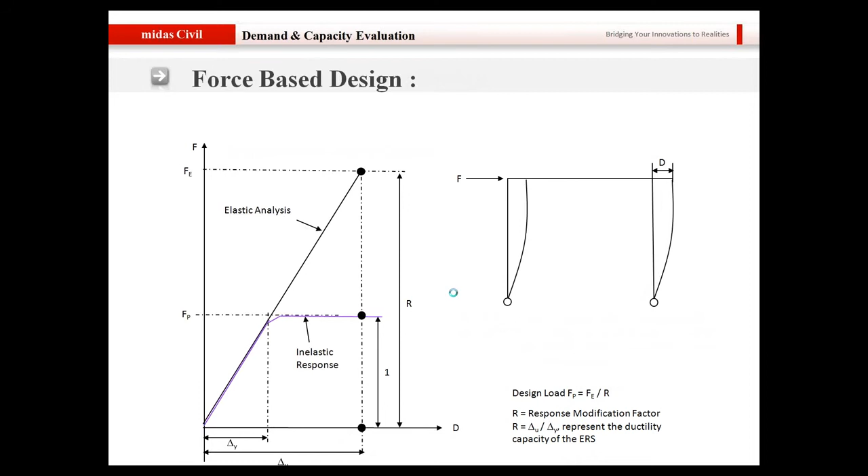What we used to do is obtain an equivalent force which is obtained by earthquake. So whenever you apply an earthquake load to the bridge, you will obtain a certain force on different elements, and basically you design the elements based on that load so that the bridge remains safe for a specific type of earthquake.

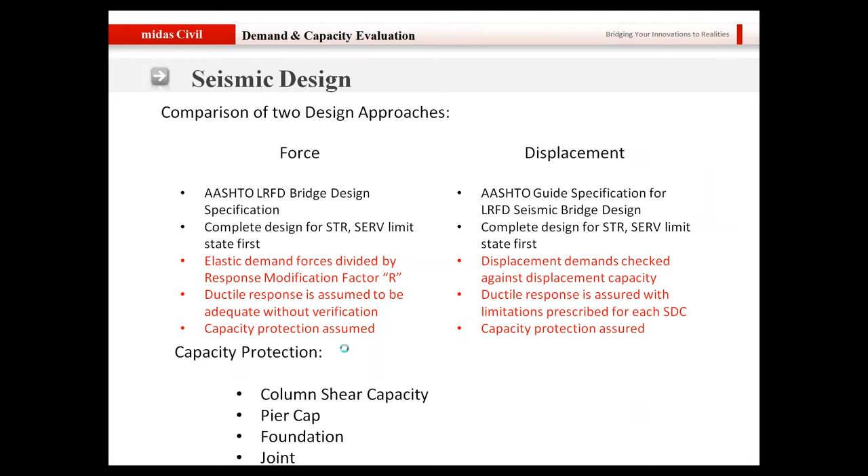And the capacity protection is done for column shear capacity, pier cap, foundation, and joint. In the second session that was done by me, I talked about the various steps which are involved in the AASHTO LRFD Seismic Design criteria to perform the displacement-based design, and I gave you the flow chart with the steps that you need to follow to perform this kind of check.

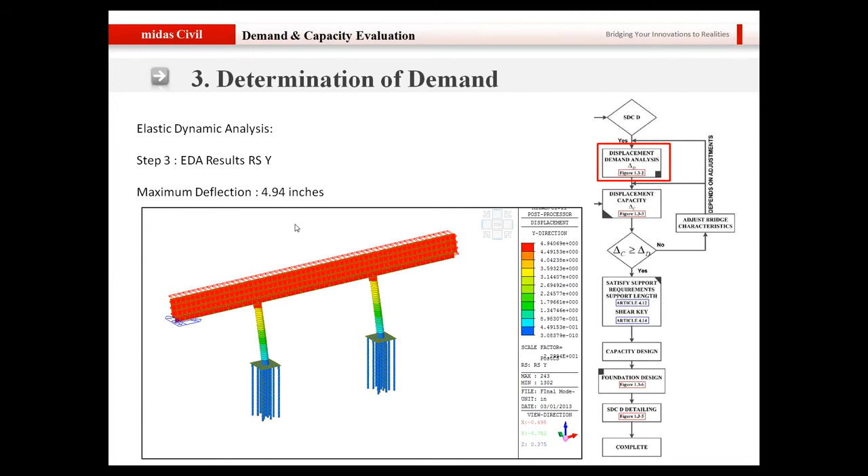And here we talked about a bridge which was a conventional bridge, and we performed elastic dynamic analysis with the provisions from AASHTO LRFD code, and we obtained the demand in the event of an earthquake. Similarly, we obtained the demand in the y direction, and then we performed the pushover analysis to obtain the capacity in the x and the y direction.

And then the capacity check was done, and this way we did the discussion on this kind of a bridge by following the procedure as given in the AASHTO LRFD Seismic Design criteria.

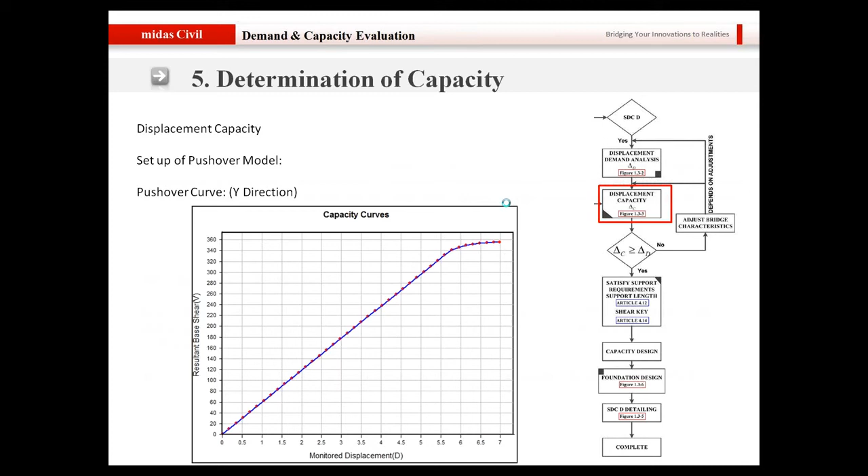Now I would like to talk more in detail about the seismic analysis, what are the different types of seismic analysis that you can perform, and what are the different advantages and disadvantages of these types of analysis. Before we actually start learning how to perform the seismic analysis in Midas Civil, I will take you through a brief introduction or theoretical background of these different types of analysis, and then we are going to simulate those types of analysis in Midas Civil.

So first of all, let me talk about what seismic analysis is. Seismic analysis is a subset of structural analysis, and it is the calculation of the response of a bridge or building structure to earthquake. So basically, in the event of an earthquake, we determine what will be the effect on the structure, and to obtain that effect, whether it is in the form of force or displacement or deformation or whatnot, it is known as seismic analysis. And why is it important?

It is important because, in the event of an earthquake, we do not want our structure to fail, or we do not want our structure to collapse, because it might lead to loss of property or loss of lives. So that's why we want our structures to be safe, and that is why the seismic analysis is becoming the need of the hour.

So let us talk about the consequences of earthquake. What actually happens when an earthquake occurs, or in the event of an earthquake, what are the different consequences that are faced by a building or a bridge.

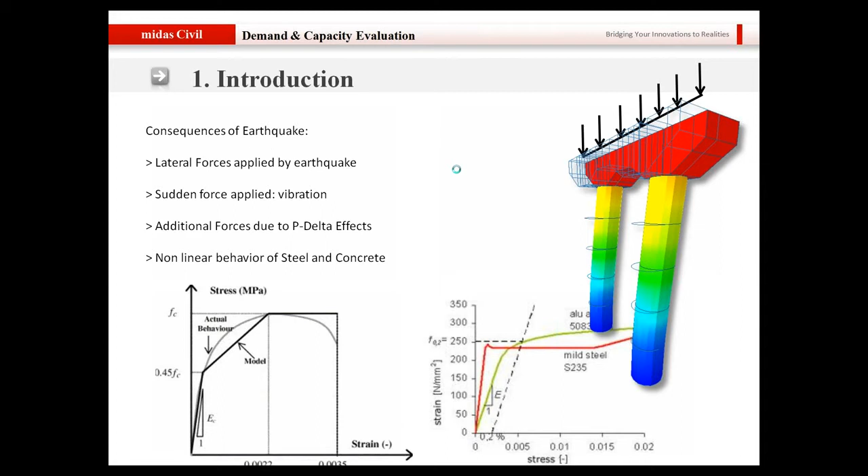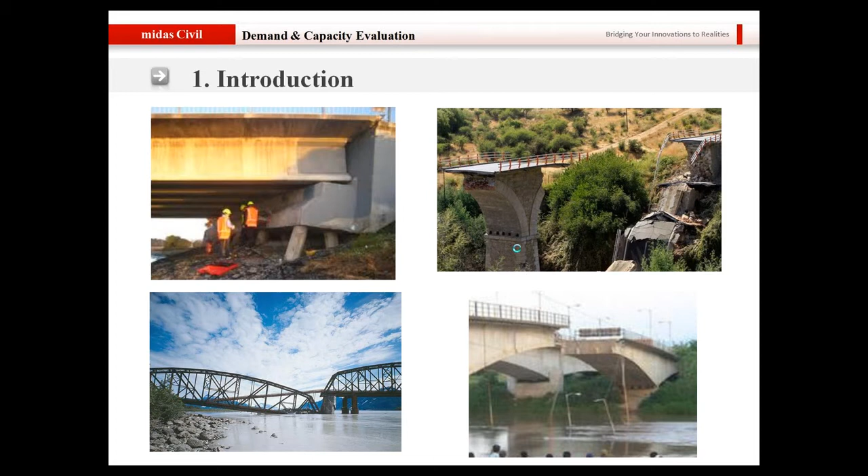So if the structure is supposed to behave elastically and we perform static analysis, we call this approach the equivalent force approach. So what we do in this method is we apply an equivalent lateral load to the structure and we obtain the force effect or the displacement in the event of an earthquake.

If we suppose the structure to be in the elastic region and we perform dynamic analysis, the type of analysis is dynamic, in which the equation of motion is used. We call it the response spectrum analysis, or if you talk about the AASHTO LRFD Seismic Design criteria code, they call it elastic dynamic analysis. So when you say elastic, it is the structure action, and when you say dynamic, it is the type of analysis.

If you consider the structure to be of nonlinear behavior, you take into account the nonlinearity of steel and concrete, and if you perform a static analysis, it becomes a nonlinear static analysis, also known as pushover analysis. And if you take into account the nonlinear behavior or characteristic of steel and concrete and you perform a dynamic analysis, we call it a nonlinear time history analysis.

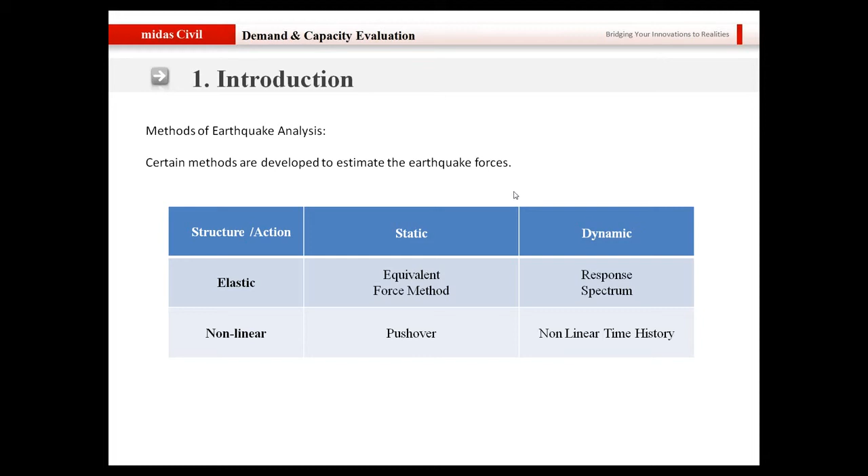The disadvantages are it doesn't take into account the dynamic response of the structure. As I said, in the event of an earthquake, the structure vibrates. There is an acceleration, or you can say force applied to the structure, and it must have some dynamic response to it, and this method fails to capture that.

The non-linearity of the material is ignored because it's a static seismic analysis. We consider the structure to be in the elastic region. We ignore the non-linearity, and it does not lead to detailed response in earthquake.

In the event of an earthquake, there would be vibration. The structure might respond differently with time. The deformations may increase or decrease with time, and since it's a static seismic analysis method, it doesn't give us the detailed response in the event of an earthquake. It might give us the maximum deformation and stuff like that, but it doesn't give us what the response will be with respect to time.

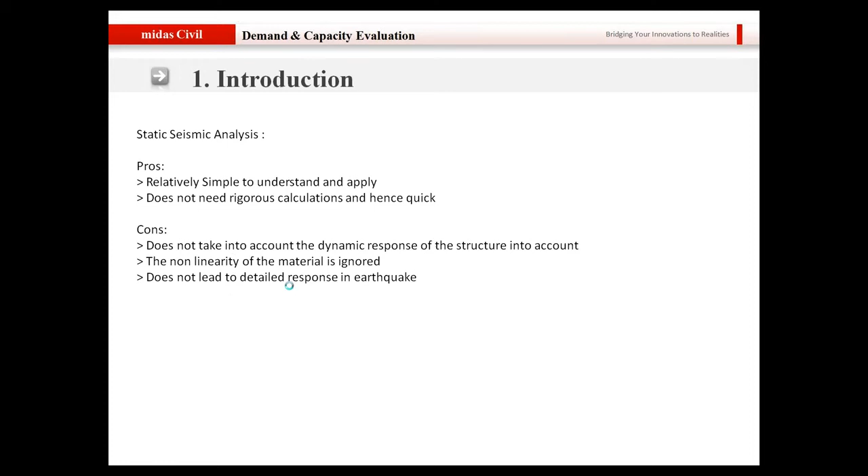There are certain disadvantages with this method: you cannot consider the non-linearity of the material. It is ignored, and it does not lead to a detailed response again. Basically, you do not apply a timed force to the structure, and it does not lead to detailed response in terms of the event of an earthquake.

Now, talking about the nonlinear static analysis or pushover analysis, there are certain advantages. It is simple to understand and apply. If you see the theory behind the pushover analysis, which I'm going to talk about later during the session, you will see that it's relatively very simple to apply, and we take into account the nonlinear behavior of concrete and steel.

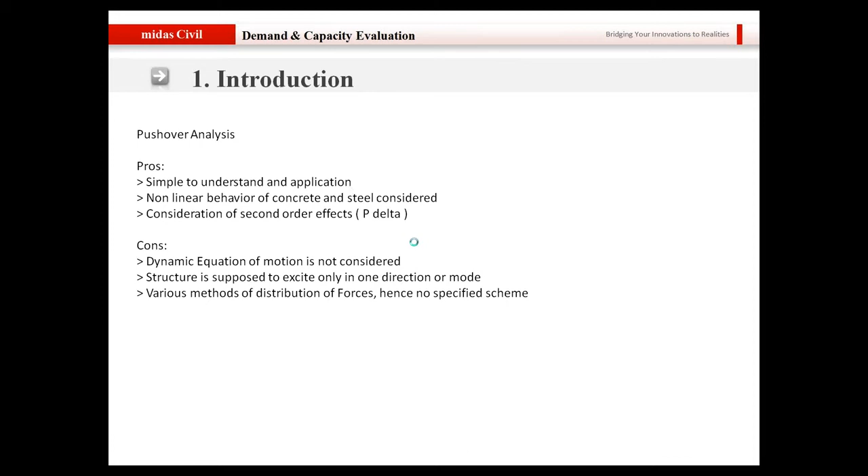Now let us talk about the fourth category of seismic analysis, which is time history analysis. It is the best among the different types of analysis we talked about, and it has certain advantages. It considers the dynamic equation of motion, so it is realistic. It takes into account the nonlinear behavior of concrete and steel, so it's more practical. It gives the displacement, velocity, or acceleration of the structure with time, basically the response of the structure with respect to time. It is better, and it considers damping, so it's more realistic.

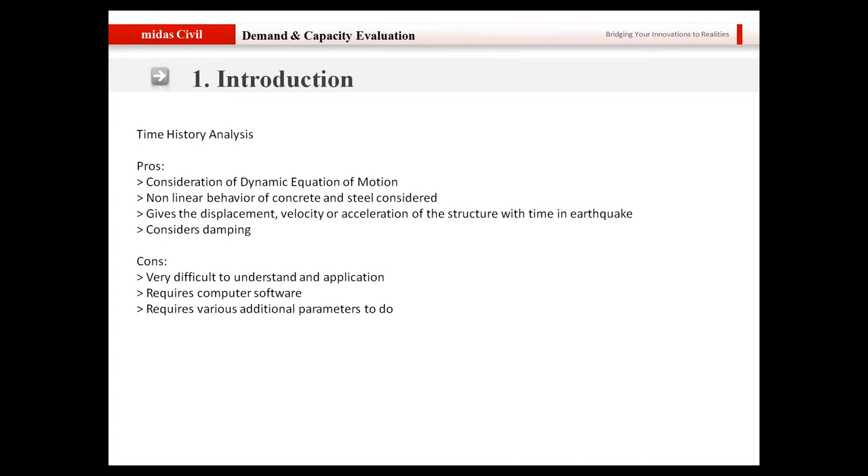But there are certain disadvantages with this method. It is very difficult to understand and apply. You have to apply the equation of motion and consider the nonlinear behavior of concrete and steel, so it is complicated to understand and apply, and it generally requires computer software. If you want to perform this type of analysis with hand calculations, it might take months even for a simple structure, and it requires additional parameters to perform this type of analysis. So when performing time history analysis, you have to take into account so many parameters of the bridge that sometimes it becomes disadvantageous.

Now let us talk about what the AASHTO LRFD code says about seismic analysis. I have listed down several specific features of our code, and first I'll be talking about the different highlights. The code adopts a 7% in 75-year design event for the development of a design spectrum, and we should ensure sufficient conservatism.

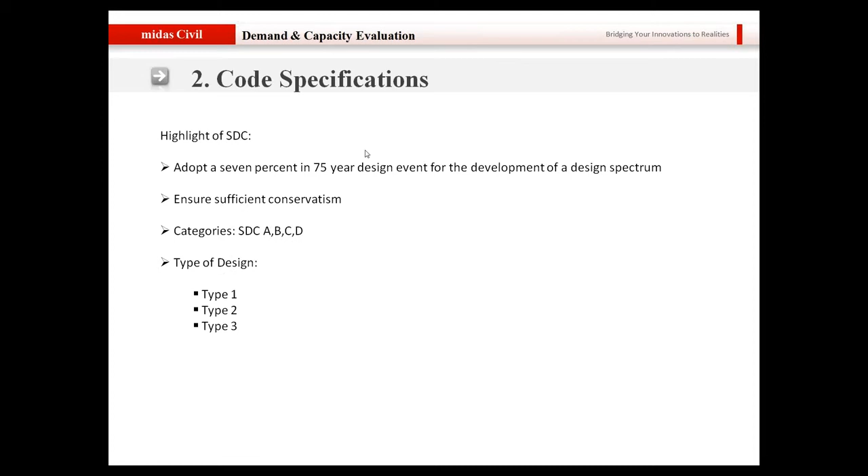There are several categories: A, B, C, and D, with different types of design. I discussed the details about these categories and design in the previous session, but just to recapitulate, I'm going to talk about the different categories of SDC here. In SDC-A, no displacement capacity check is needed as per the code. No capacity design is needed. SDC-A minimum requirements are to be there, and you don't have to perform liquefaction analysis.

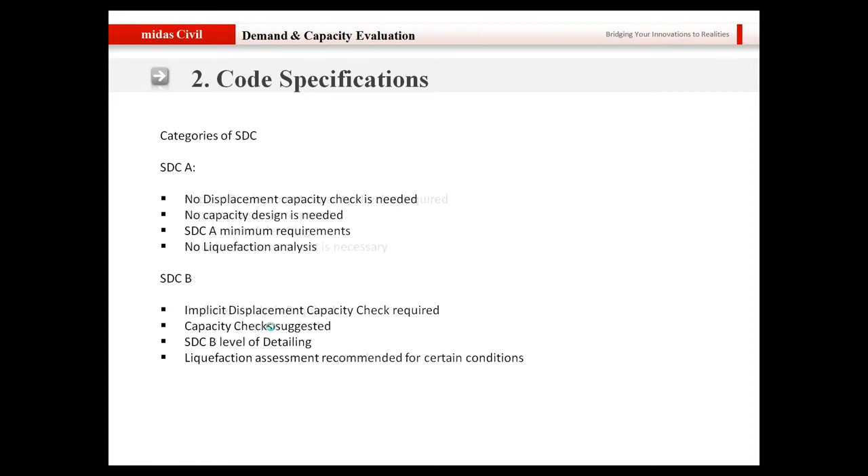So basically, when you are moving from A to D, the code becomes more and more stringent. For A, you do not need to perform any displacement capacity check, but for B, you need to perform an implicit displacement capacity check. When you talk about SDC-C, it is again more stringent compared to SDC-B, and SDC-D is the most stringent amongst all. For SDC-D, you need to perform pushover analysis and capacity design. The SDC-D level of detailing is required, and the liquefaction assessment is a must for this category.

Talking about the type of design: type 1 would be a ductile substructure with an essentially elastic superstructure. Type 2 design would be an elastic substructure with a ductile superstructure, and type 3 would be elastic superstructure and substructure with a fusing mechanism at the interface between the superstructure and the substructure. So when talking about type 3 design, you have to have certain types of bearings which control the flow of forces from the superstructure to the substructure.

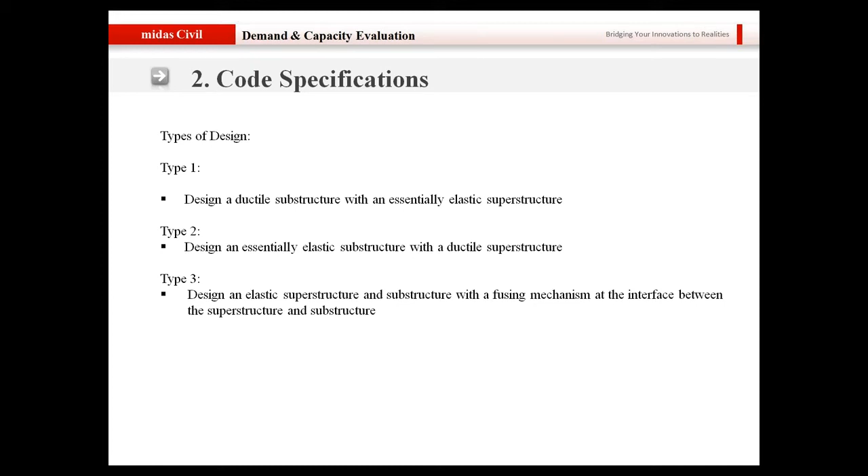Talking about the flow charts given in the code for performing the check for these categories, here you can see the check for SDC A, B, C, and D. SDC A doesn't require the demand analysis, but SDC B, C, and D require the demand analysis. So for obtaining the demand, we are trying to simulate SDC D here.

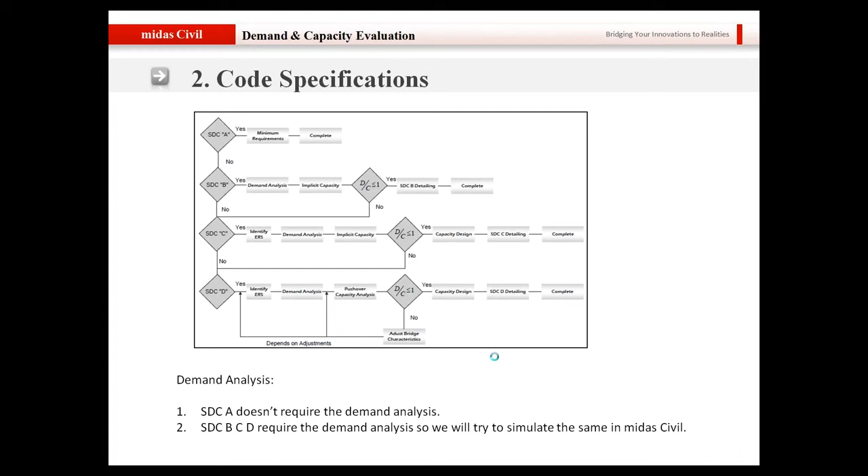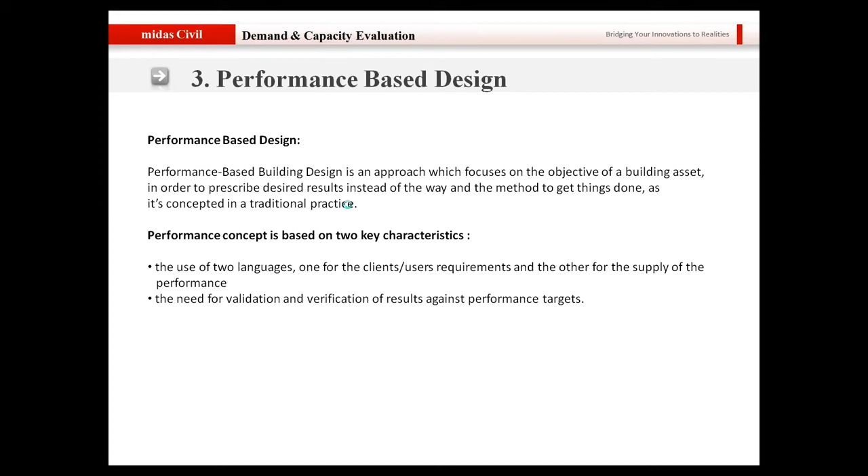Before I start talking about the elastic dynamic analysis for an SDC D structure, I'm going to talk about performance-based design. Performance-based design is an approach which focuses on the objective of a building asset in order to prescribe desired results instead of the way and method to get the things done. So when you talk about performance-based design, first you set up what is the performance criteria for a structure, what is the demand, and based on the demand, what is the capacity of the structure. The assessment would be okay as per performance-based design when the capacity is greater than the demand.

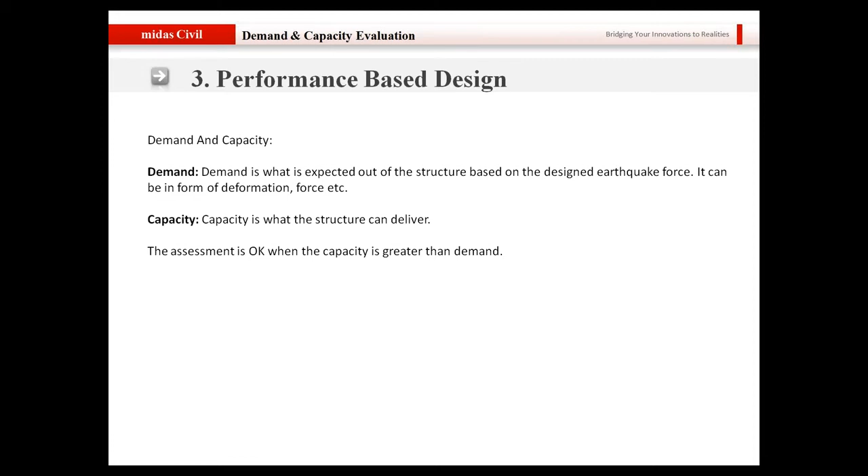If you talk about the demand analysis, for seismic design category A you do not need to perform this kind of analysis, as I said earlier. But for B, C, or D, you use procedure 1 or 2.

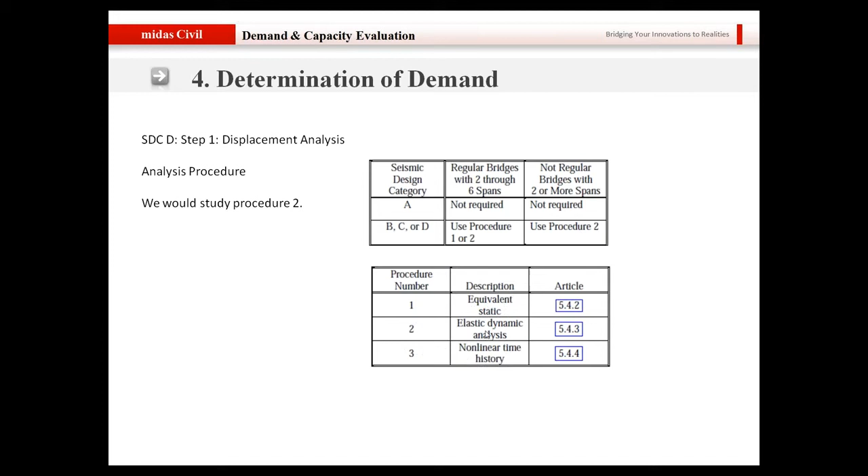Procedure 2 is elastic dynamic analysis, procedure 1 is equivalent static analysis, and procedure 3 is nonlinear time history analysis. Today we are going to talk about the elastic dynamic analysis.

There are certain considerations or guidelines which the code specifies for performing this type of analysis. First, we need to take into account different modes for performing this type of analysis. The damping must be selected as 5%, and the results in different modes should be combined as a complete quadratic combination. As I said earlier, there are different methods of combination of results for elastic dynamic analysis, and the complete quadratic combination is one of them.

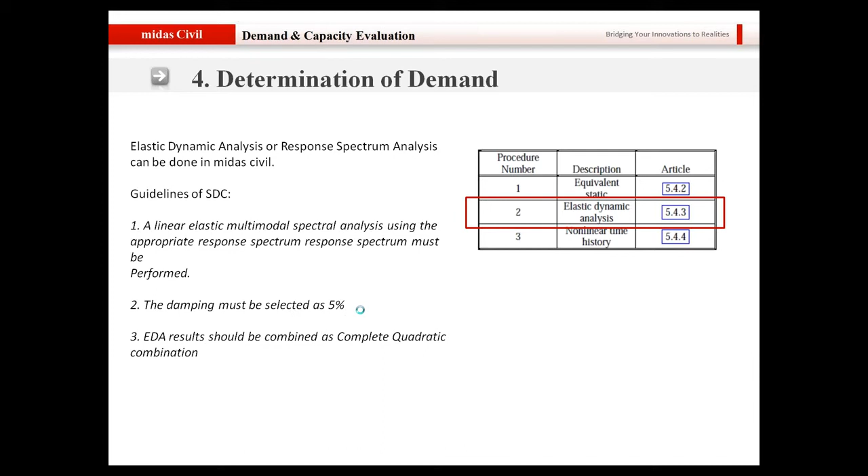The code specifies that we have to combine the results as per the complete quadratic combination. I'm going to talk about what this combination is, but before we do that, let us talk about the theory of response spectrum analysis.

As I said earlier, response spectrum analysis is a dynamic analysis which combines the response spectrum with the time period of the structure. Basically this kind of analysis utilizes an equation of motion to obtain the effect of the structure in the event of an earthquake.

The mass matrix multiplied by the acceleration, the damping multiplied by the velocity, and the stiffness multiplied by the deformation will be equal to the mass of the structure multiplied by the ground acceleration. But the question is how to obtain the ground acceleration.

The ground acceleration would be obtained as a combination of response spectrum and the eigenvalue period. So when performing response spectrum analysis, step one is to obtain the period of vibration in different modes for the structure, and on the basis of that period you will obtain the ground acceleration to be used in this equation.

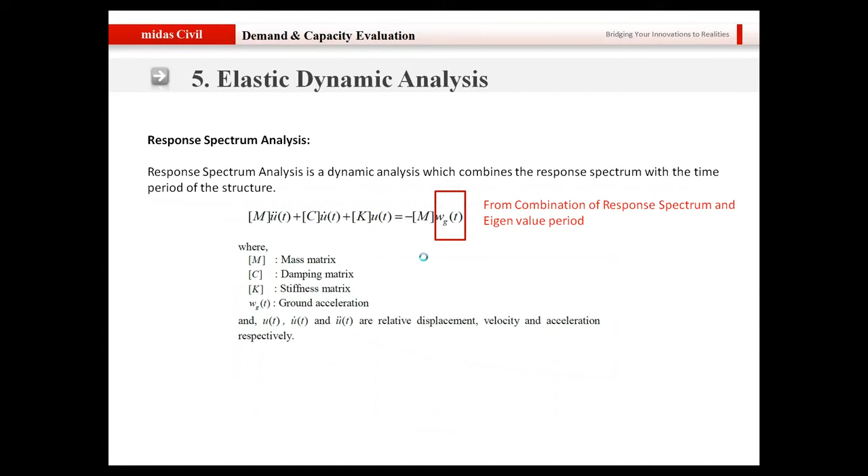Let me talk about the two requirements to obtain the acceleration. I said you need to have a response spectra. What is this response spectra? The response spectra is a function of period.

It's a function of period with the spectral acceleration, and in the last session I talked about how you can obtain this kind of response spectra as per the code. The code has different charts where you can obtain the different values that you need to obtain this kind of response spectra.

After you obtain the response spectra, you will obtain the period of vibration of the structure in different modes. Here I have shown the example of two modes of vibration for this structure, a pedestrian bridge - mode 1 of vibration and mode 2 of vibration. The time period of that vibration will be combined with the response spectra to obtain the acceleration.

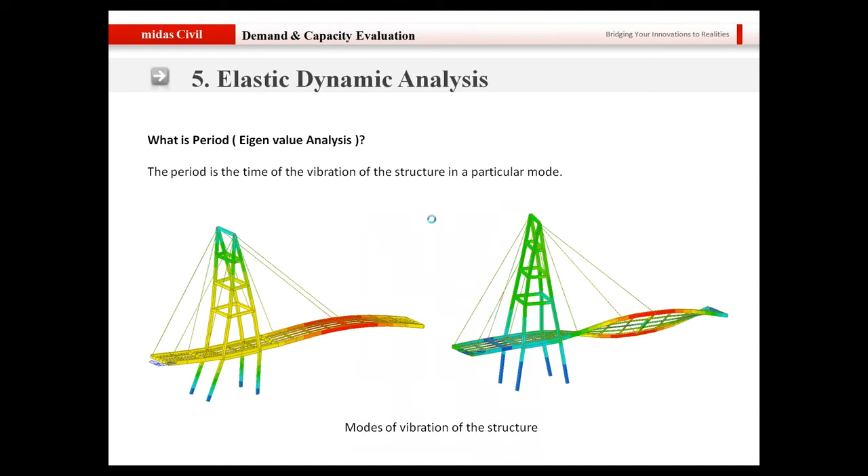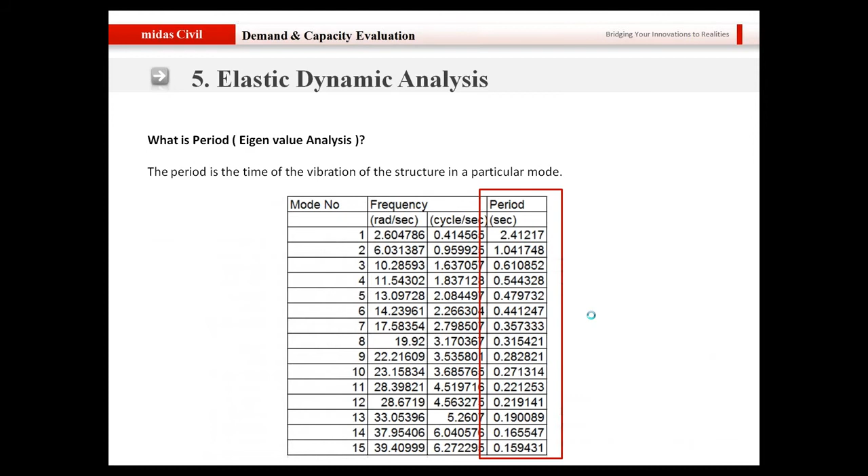I performed eigenvalue analysis and obtained the different modes of vibration and the period. Once I obtain the period, I will plot it with the response spectra and obtain the acceleration for different modes. For mode 1, the period is 2.41 seconds.

We will obtain the acceleration as 0.75 times the acceleration due to gravity. The 2.41 period will be somewhere here, and when you draw a straight line and extend it towards the spectral acceleration, you will obtain an acceleration of 0.7 times g. For mode 2, the period would be 1.04 seconds, so the acceleration would be approximately 1.25 times the acceleration due to gravity.

This is how the response spectrum analysis, or the elastic dynamic analysis, works. You will obtain the acceleration that you multiply with the mass matrix to be used in the equation of motion to obtain the effect on the structure.

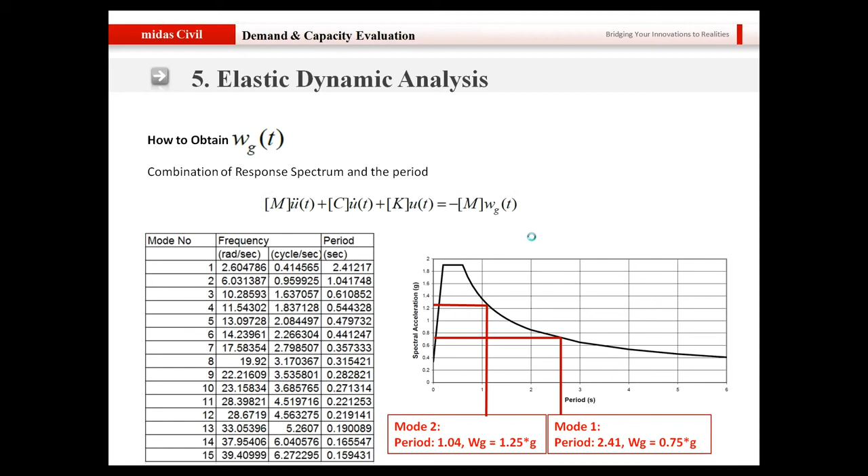As I said earlier, you need to combine the results from different modes while performing response spectrum analysis, and there are several approaches to do that. The first and easiest approach is the absolute sum, where you just keep adding the effects obtained from individual modes. The second is SRSS, the square root of sum of squares.

So basically you take a square root of the sum of squares of different effects. If you talk about the reaction at a particular bearing, you will obtain the reaction due to different modes, and then combine them using the square root function.

But the complete quadratic combination is a little bit complicated, and this is what AASHTO LRFD specifies. It takes into account the damping ratio as well as the response and the peak response, and this is how it's combined. So it's a bit complicated, but this is what AASHTO specifies for obtaining the results of elastic dynamic analysis.

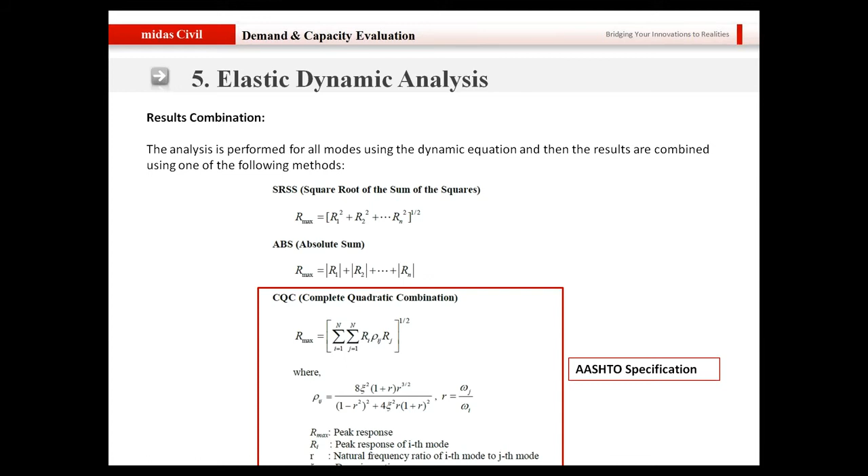So now we'll talk about how you can perform elastic dynamic analysis in Midas Civil.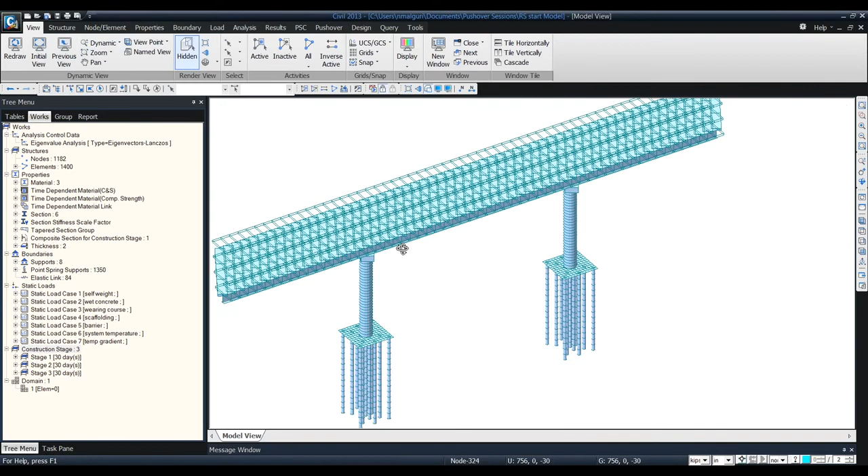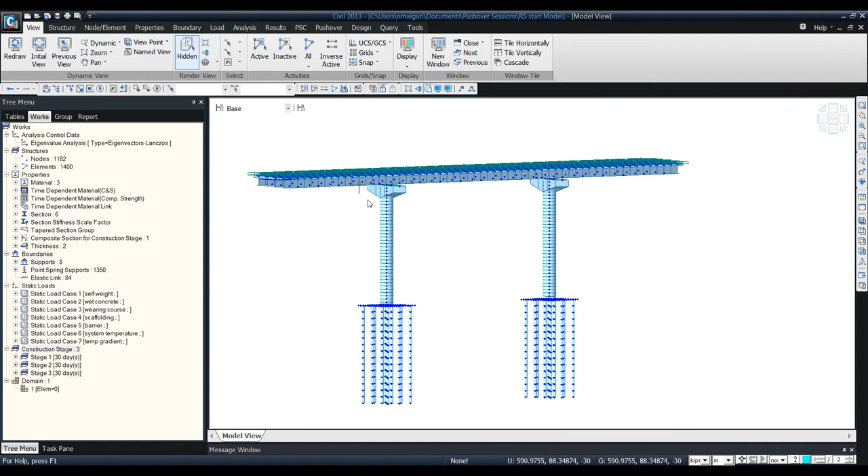Let me first talk about the specifications of this particular bridge. It's a skewed bridge and it's a steel composite bridge. For performing different types of analysis, I have considered the different elements of the bridge. You can see the substructure is modeled, the piers and pier cap are modeled. I have modeled the bearing connecting the pier cap and the girder, and I have also modeled the foundation so that I can perform the soil structure interaction.

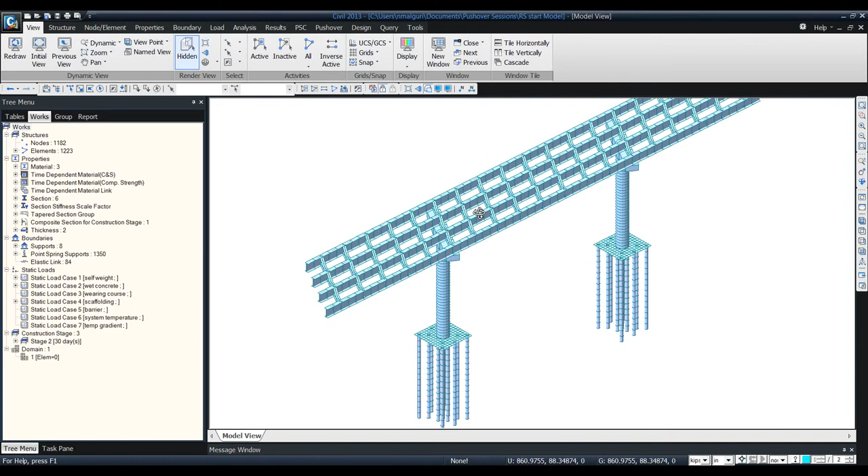Basically for this particular bridge, I modeled 3 different stages. Stage 1 is where the substructure has been erected, then stage 2 is when the steel girders have been erected. At this stage the steel girders are not composite with the concrete deck on top, and in the 3rd stage the concrete becomes composite with the steel girder, making it a composite bridge. So these are the 3 different stages modeled in this bridge.

So for performing the elastic dynamic analysis, first we need to define the mass of the structure. For defining the mass, we have 2 options in Midas Civil. The first option is to define the mass manually, by going to Load and defining it there. Under Load and Static Loads, you can define the nodal masses, select the nodes, and define different types of nodal masses.

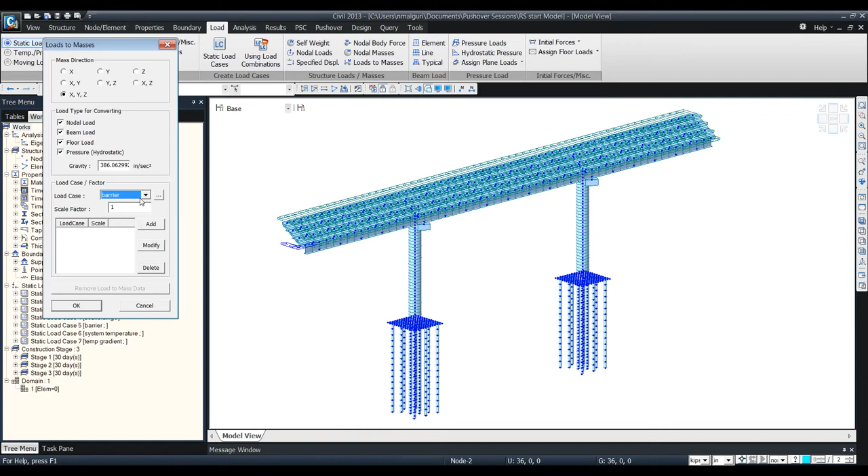If you have defined certain static loads on the bridge which you want converted to masses for seismic analysis, you can use the Load to Masses function. Let's say you have barrier loads. The barriers aren't modeled in this bridge; I just applied the barrier load as a uniform load. So I'll convert the barrier load into mass using the Load to Mass function, and once I do that, the barrier load is applied as mass onto the edges of the bridge. Similarly, if you want to convert the wearing course load into mass, you can also do that.

So I selected the load case as wearing course, and once I click on OK, you will see that the wearing course has been converted into the mass.

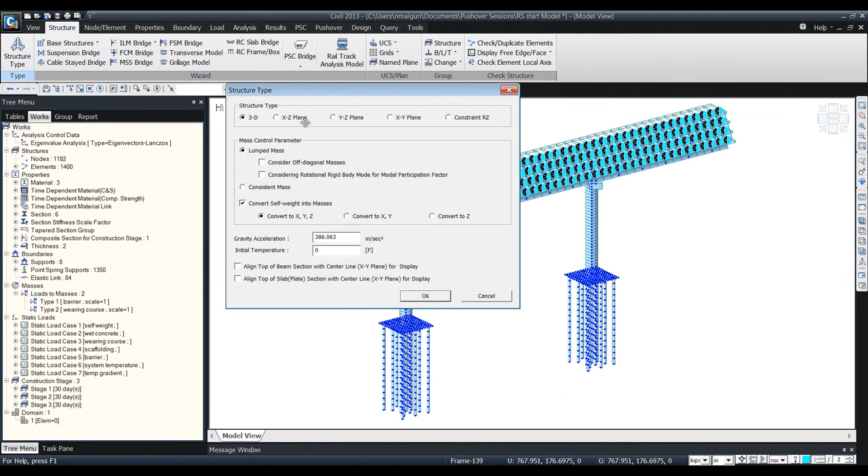The second method of defining the mass to the structure is converting the self-weight into the mass. For that, you will go to the structure option and click on structure type, and here you can see an option called convert self-weight into masses, wherein you can convert the self-weight into mass in the X, Y, and Z direction. Once you do this, the self-weight will automatically get converted into mass in those directions.

Now, as I said before, for performing the elastic dynamic analysis, you need to obtain the period of different modes of vibration. So for obtaining the period, we will perform an eigenvalue analysis. I'll go to analysis, then eigenvalue analysis, and here I'll define the number of modes that I want for this particular bridge. I've defined the number of modes to be 50, and once I do this, the eigenvalue analysis is defined for this particular bridge.

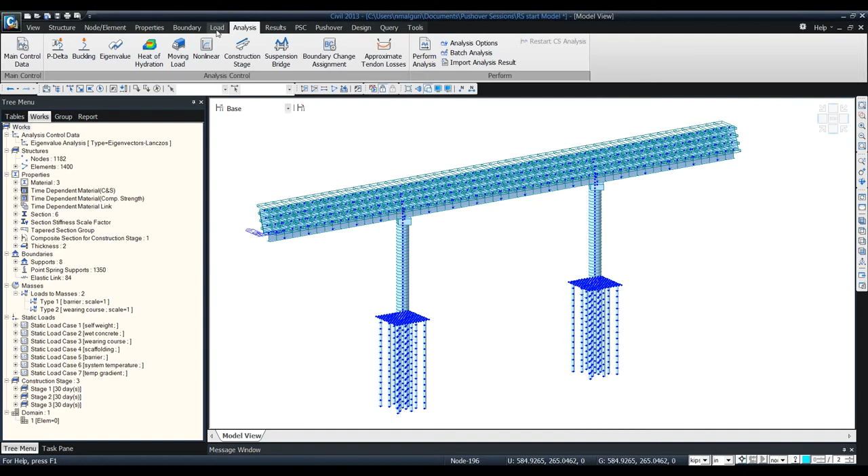After we do this, we can define the specifications for response spectrum analysis. For that, I'm going to go to load, then the seismic section, where you can define the response spectrum function. First I'll click on Add, and here you can see that you can specify the period and the spectral data.

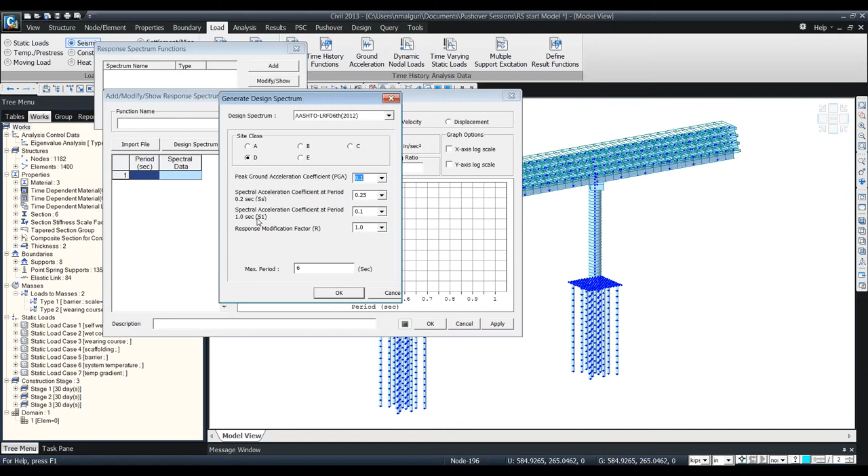In Midas Civil, we have a built-in function for the definition of response spectra as per AASHTO LRFD 6th edition, and you can select the site class. You can define the peak ground acceleration, the spectral acceleration coefficient at short period and long period, and specify the response modification factor. Once you click on OK, the response spectrum will be automatically defined by the program. So basically all you gotta do is specify the features, and the response spectrum will be automatically defined.

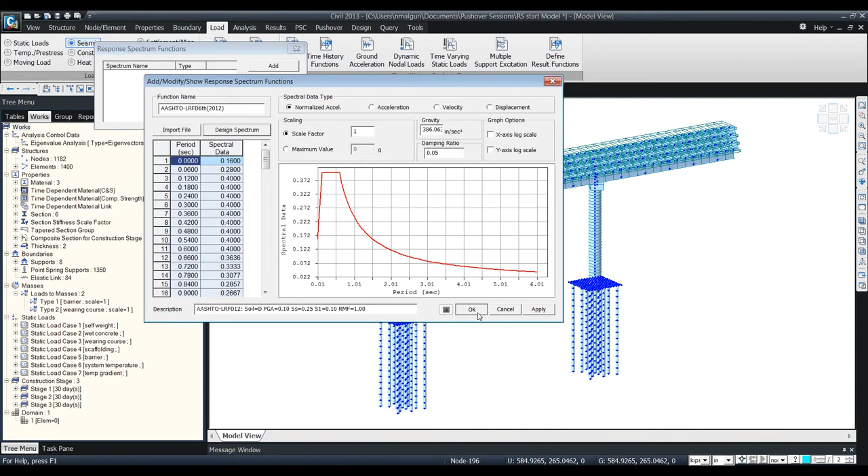Now once I click on OK, you will see that the response spectrum function has been defined. So this is step one. Right now you have defined the response spectrum function, but now you will tell the program that you will use the response spectrum function to perform the response spectrum analysis in the X and the Y direction.

So for that, I'm going to go to the response spectrum load cases, and I'm going to create a response spectrum in X direction. I'll name it RSX, and click on the response spectrum function that I'm going to use, then click on apply damping method. I will apply the damping ratio for all modes to be 0.05, and once I click on OK and then Add, the response spectrum load has been applied. So basically I have specified the response spectrum load in the global X direction.

For applying the response spectrum load in the global Y direction, I can put the excitation angle to be 90 here, and again I click on Add to obtain the load case RSY in the Y direction.

In Midas Civil, you can click on the modal combination control here, and select what type of modal combination you want. As I said before, AASHTO LRFD specifies that we use the complete quadratic combination, so we will select CQC here. If you want to specify a factor to any specific mode shape, you can specify the factor here, and once you click on OK, you are using the CQC method for performing the response spectrum analysis.

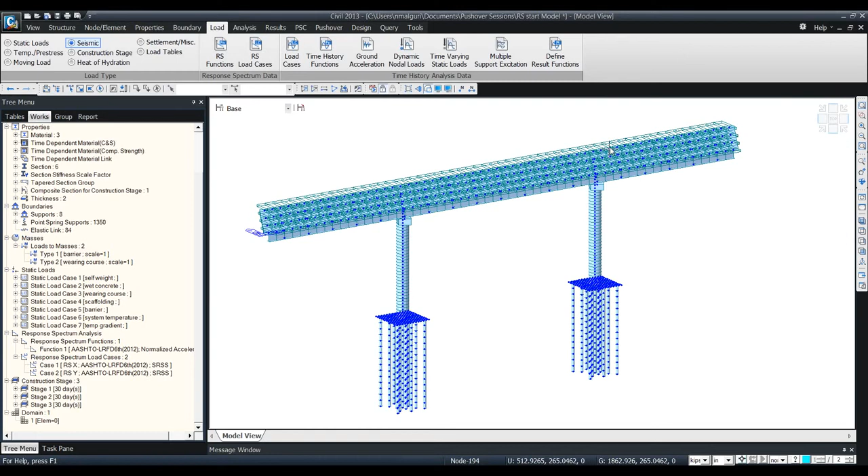So as of now, the definition for response spectrum analysis is complete, and now we are going to perform analysis to obtain the results for response spectrum analysis. I'm not going to perform the analysis in front of you because it might take about 30 seconds. So I'm going to open a model in which I have performed response spectrum analysis, and I will use that model to show you the results.

After I perform the analysis, I can go to the results tab, and if I want to obtain the deformation due to response spectrum analysis, I can go to deformation, then displacement contour, and I will obtain the deformation for the response spectrum in the X direction. So I will select the load case as response spectrum in the X direction.

I will select the component as DX, and I will click on legend, and this is how the deformation in the X direction looks like.

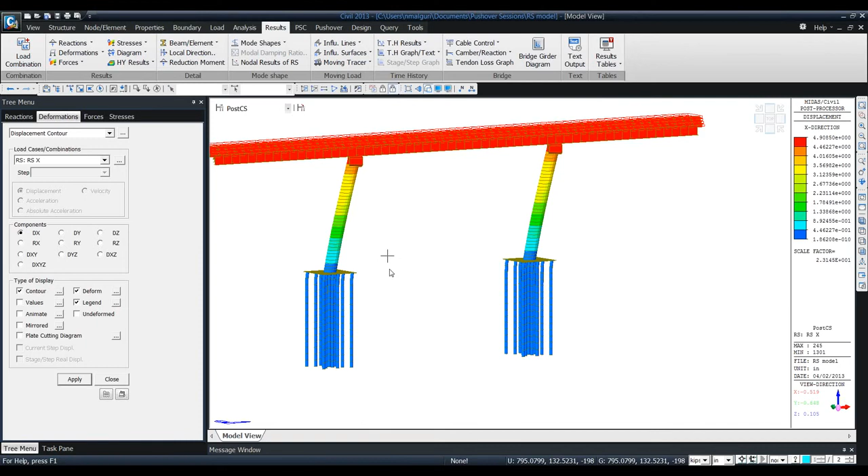If you remember in the last session, I told you that AASHTO LRFD specifies that the foundation must be taken into account to perform the demand analysis. So in this particular model, we do have the foundation with us. Basically, you are performing the response spectrum analysis and soil structure interaction in the same model file.

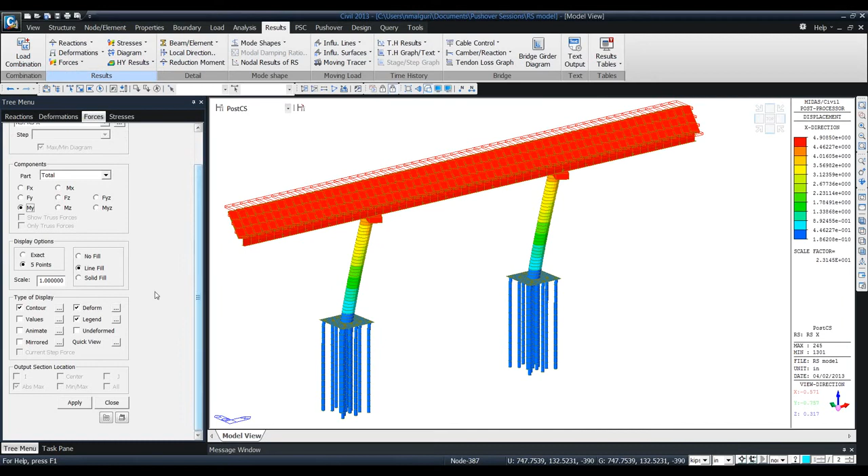You can obtain the demand from this function. If you want to obtain the forces, you can go to Result, Forces, Beam Diagrams, and let us see what is the bending moment generated in this particular bridge for the pier section after we perform the response spectrum analysis. So this is how the bending moment is generated. You can see the highest bending moment is being generated in the pier section here.

So basically you can obtain the force results. If you want to obtain the stresses, you can go to the stresses section and you can obtain the stresses due to the response spectrum loads. So this is how you perform response spectrum analysis in Midas Civil, and you obtain the results for the same, and basically the demand analysis section is completed.

Now I'm going to go back to the presentation again, and we are going to talk about how to obtain the capacity from Midas Civil.

So step 2 would be capacity determination, and here we are going to use the pushover analysis as specified in the code for SDC-D.

For SDC-B, C, and D, the bridge design shall specify the following specification: the demand must be less than the capacity. For the calculation of the capacity for SDC-D, we can perform nonlinear static analysis, that is pushover analysis. But for SDC-B and C, you can use the equations which are provided in the code, and you can obtain the capacity.

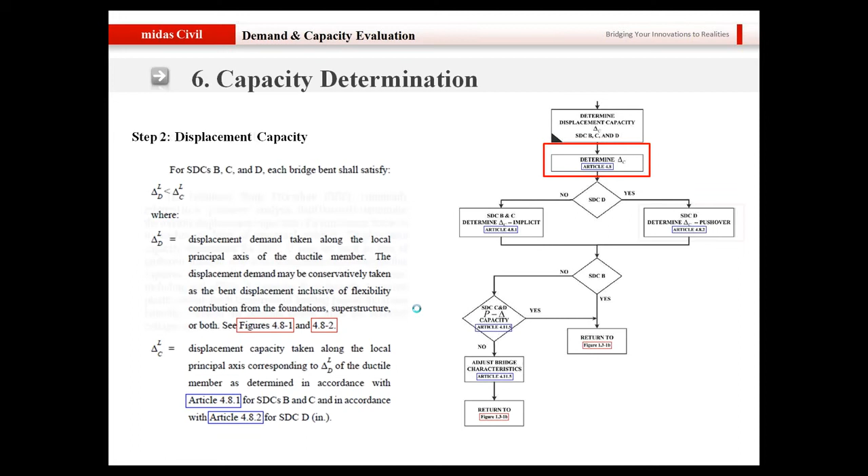For performing the nonlinear static analysis, there is a procedure given in the code, and this criteria has to be followed while performing the pushover analysis.

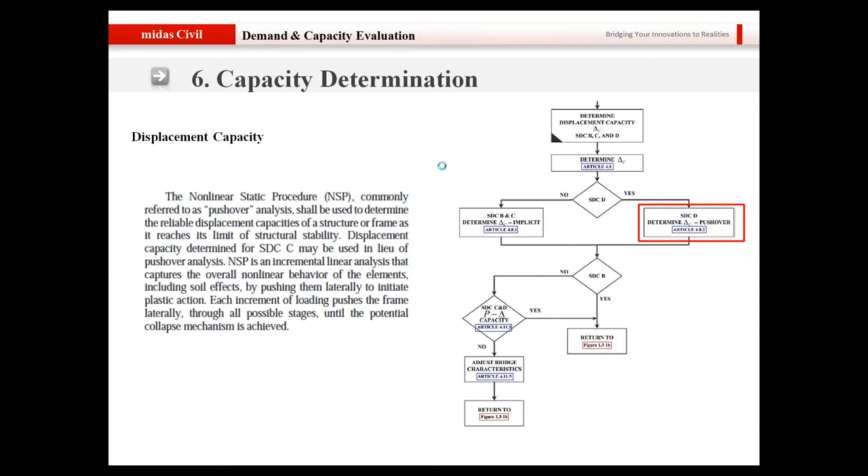But before we actually do the pushover analysis on Midas Civil, I would like to talk about the theory of pushover analysis and what exactly this type of analysis is.

As I said earlier, pushover analysis is nothing but static nonlinear analysis. So the load application will be static, and we will consider the nonlinear behavior of concrete and steel present inside the bridge. It's a technique by which a structure is subjected to an incremental lateral load of certain shape.

As I said, there are different types of load application mechanisms when you talk about pushover analysis. The sequence of cracks, yielding, plastic hinge formation, and failure of various structural components are noted. As you keep on increasing the lateral load, some of the elements of the bridge will yield, plastic hinge formation will take place, and there would be failure of various structural components. They would be noted, and the structural deficiencies are observed and rectified.

So once you are performing pushover analysis, you will visualize, okay, this is the part of the structure which is going to be affected the most. This part will have plastic hinge generation, or this part is prone to failure. So you will do the retrofitting, etc., whatever is required for that particular structure.

Here I have shown you the incremental loading that you will apply for performing the pushover analysis. So you will keep on increasing the lateral load. Here I have used the method of uniform acceleration, so basically all the masses inside the structure, a uniform load will be applied in different increments.

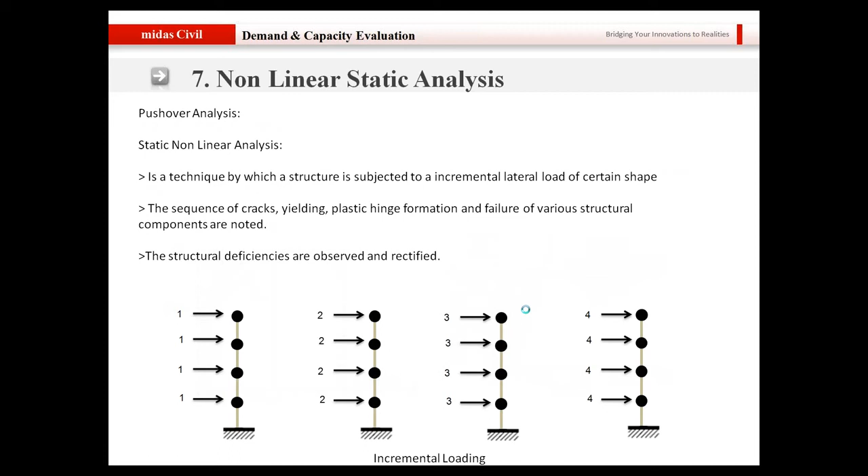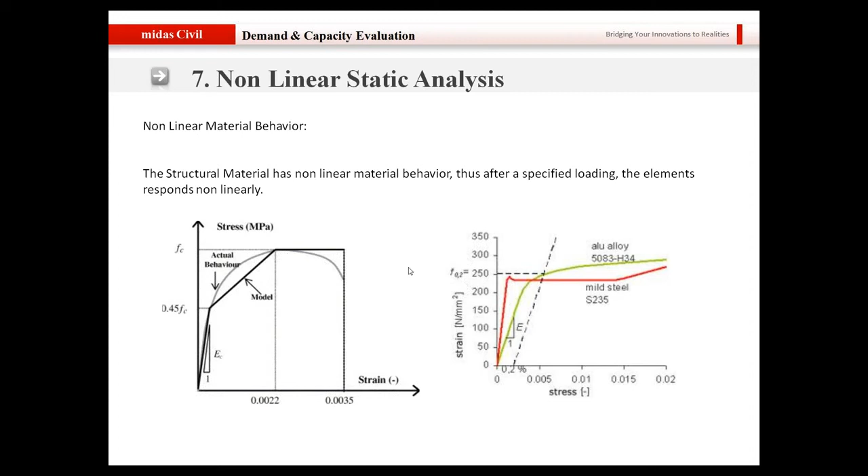Talking about the nonlinear material behavior, as you know the structural material has a nonlinear behavior after a specific loading. This behavior will be taken into account while performing the nonlinear analysis. When you talk about concrete, this is how concrete behaves, and when you talk about steel, this is how steel behaves. So basically for pushover analysis, you are combining the increments in the load with the nonlinear behavior of concrete and steel to obtain the effect on the structure.

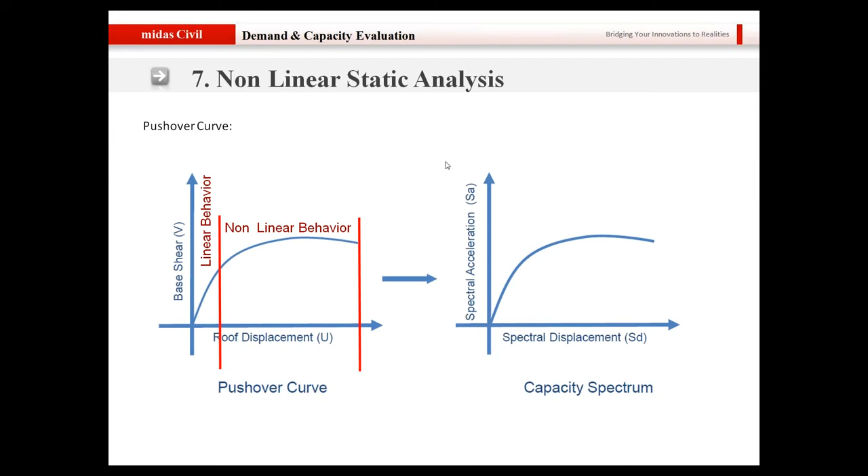And this is how it is done. So you can see when you increase the base shear, the structure goes from linear to nonlinear behavior, and you obtain the capacity spectrum for the structure. Then you combine the demand spectrum with the capacity spectrum, and then you obtain the performance point of the structure.

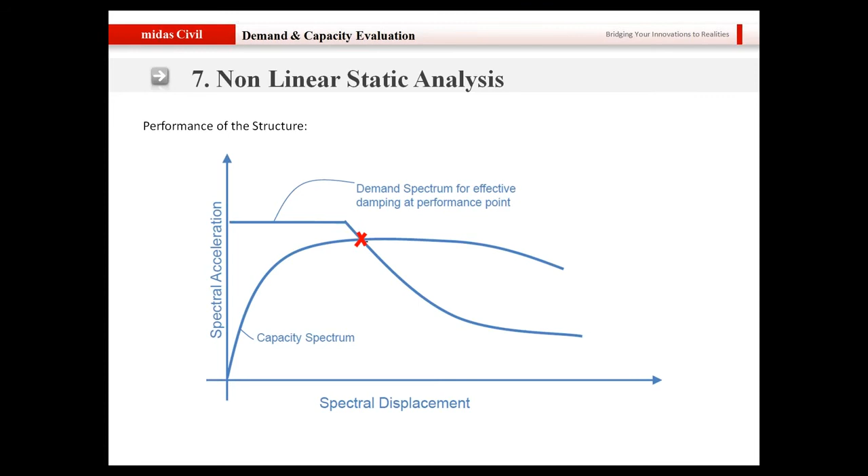Now let us talk about how to perform pushover analysis in Midas Civil. There are 5 steps involved in performing pushover analysis in Midas Civil.

First, we need to define the pushover global control. Then we need to define the load cases for the pushover analysis. Then we define the hinge properties, assign the hinge properties, and perform the analysis to obtain the results for pushover analysis.

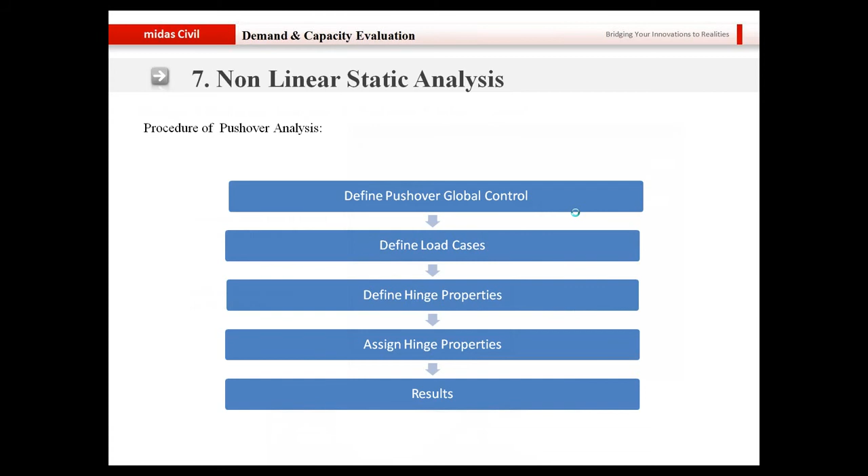So step 1 will be the definition of pushover global control. You will go to design. This is the path that you will follow for performing the pushover analysis, and this is how the global control looks like. If you want several static loads to be considered as an initial load for performing pushover analysis, you can do that in global control.

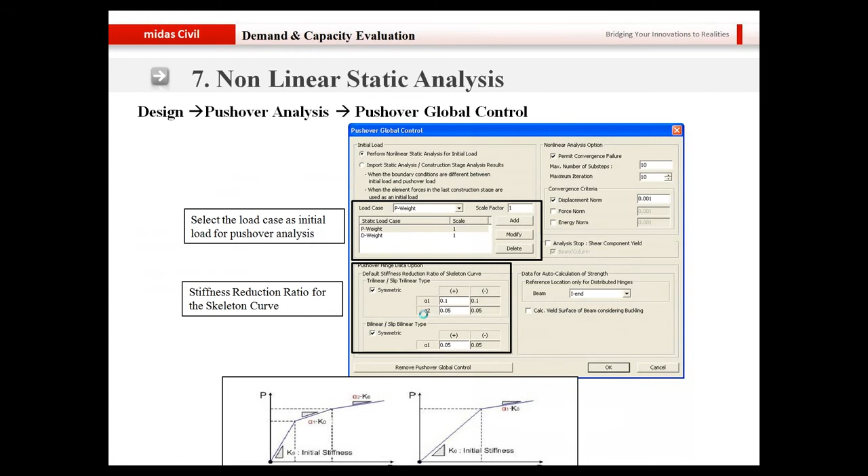Then you will define the load, the different loading mechanisms, and how the loading increment will take place. You can either choose a force-based approach, which is the load control, or you can use the displacement-based approach, which is used for obtaining a desired displacement. You can select different types of load patterns such as mode shape, modal, and uniform acceleration.

Then you can define the pushover hinge properties. For defining the pushover hinge properties, we have different options in Midas Civil. I'm going to talk about the different options while I show you how to actually perform pushover analysis in Midas Civil. Once you are done with these definitions, you perform the analysis to obtain the capacity curve as per the pushover analysis.

So now let me take you to Midas Civil itself and let me show you how you can perform pushover analysis in Midas Civil.

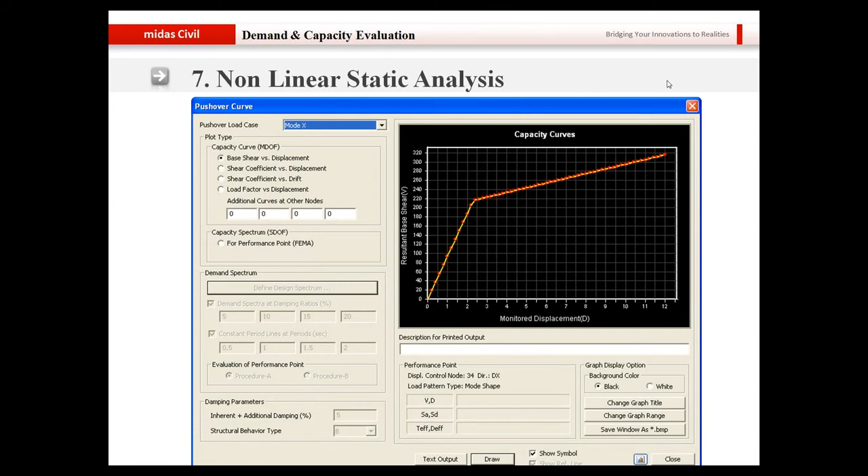So again, we are back to the model in which we performed the response spectrum analysis or the demand analysis, and now I'm going to show you how to perform the pushover analysis in Midas Civil. For performing the pushover analysis, you will go to the pushover menu bar in Midas Civil, and the first thing is to define the global control. So you will click on global control and you have different options here.

As I said before, in global control you can define whether you want to take into account several loading or any initial loading before the earthquake load is actually applied onto the structure. So you can either import the static analysis results for self-weight or construction stages or barrier or wearing coats, or if you want to perform a nonlinear static analysis for the initial load too, you can click on perform nonlinear static analysis for initial load.

But I'm pretty confident that the structure will not go into the nonlinear region for initial loading, so I'm going to keep the self-weight and the wearing coats and the barrier load as an initial loading before the earthquake lateral load is applied.

It has several other options, such as you can control the nonlinear analysis option, what are the different number of iterations that the program is supposed to perform. Then if the program encounters a yield in the shear component, and if you want the program to stop the analysis at that spot, you can check it on. Similarly, if there is an axial component collapse, you can check this option on and the analysis will stop. So this is how you can control globally what is going to happen in the pushover analysis.

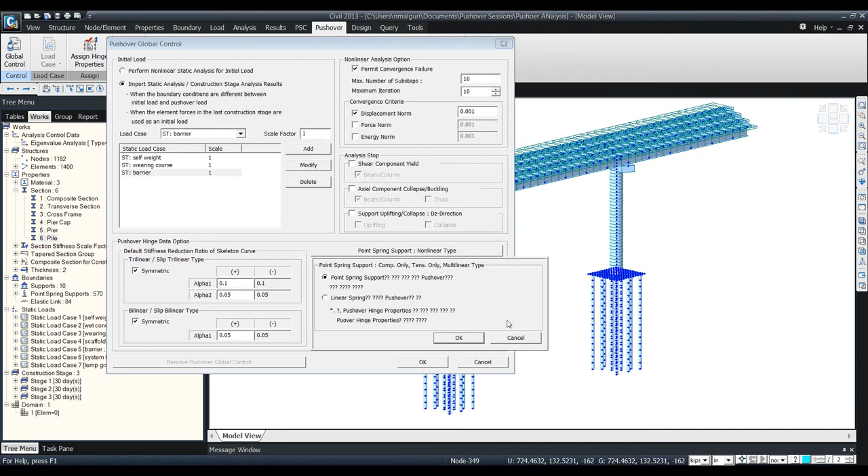While performing the pushover analysis, the code specifies that we need to take into account the nonlinear behavior of the soil, and you can do that in Midas Civil. So basically, when you are defining the point spring supports that I have defined here, you can take into account the nonlinear behavior of the soil to perform pushover analysis.

As you can see here, I have defined the stiffness of the spring like this, and you can see that I have defined a nonlinear spring for performing the pushover analysis.

These springs can be automatically defined in Midas Civil. All you gotta do is go to boundary and go to integral bridge support. You can go to pile spring and specify the properties of the soil, and Midas Civil will automatically generate the soil springs as per Matlock and Reese method. So basically all you gotta do is specify what type of soil it is, what is the ground level, the diameter of the pile, and the coefficient of subgrade reaction. Once you do these definitions, Midas Civil will automatically generate the lateral springs for you.

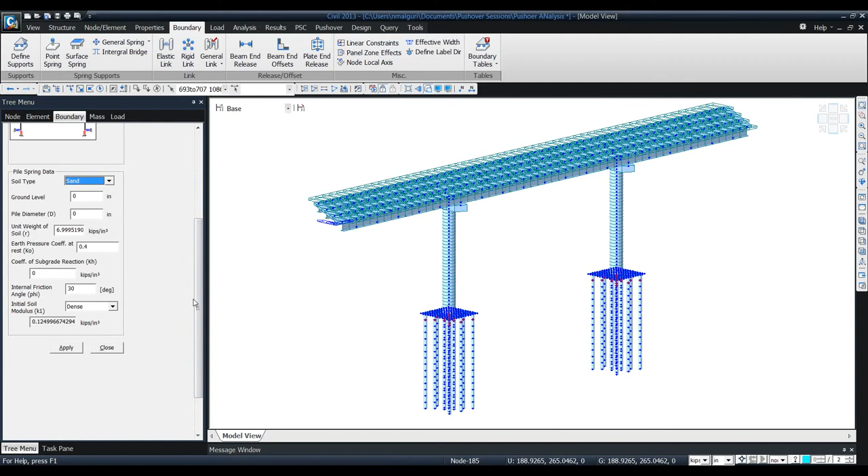Okay, so once we are done with the definition of global control, we can define the load case for pushover analysis. For defining the load case, I'm going to go to pushover load cases. I'll click on that and I'll perform the pushover analysis in the X direction, so I'm going to name it as push X.

If I want to consider P delta effect in pushover analysis, I can check this option on, consider P delta effect, and then the program will consider the P delta effect while performing the pushover analysis. You can use the initial load while you are obtaining the results from pushover analysis, and here you can use the increment method to be either load control or displacement control.

I want to perform a pushover analysis to obtain a maximum translational displacement of 7 inches in the X direction, so I specified the global maximum translational displacement to be 7 inches. But if you want to select any particular node and define the control with respect to it, you can do that.

Now the different load patterns that are available in Midas Civil are listed here. You can either use the static load to be applied as a lateral load, or you can apply a uniform acceleration in the X, Y, or Z direction. You can also ask the program to apply the load as per the mode shape, or you can use the normalized mode shape multiplied by mass option to obtain the load.

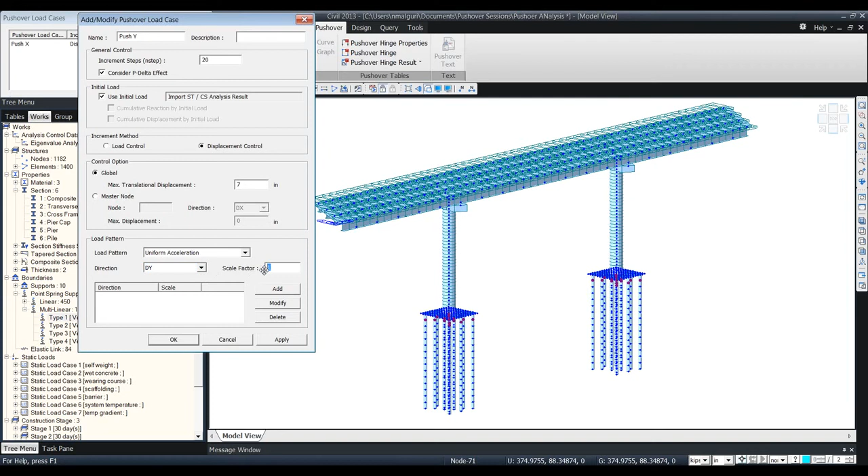And once I click on add, you can see that the pushover load cases have been defined in the x and the y direction. Now I'm going to define the hinges. As you know, the pushover analysis takes into account the nonlinear behavior of several elements in the bridge. We simulate that with the help of a hinge.

So I'll click on add, and here I'll create a hinge. First I'm going to create a hinge for the pier, and it is a column type of element, so I'm going to select column. Here you can select what type of material is there, is it a reinforced concrete, a steel, or SRC filled type of cross section. So it's a reinforced concrete pier, so I'm going to select the material type as reinforced concrete.

Now you can define the hinge in 3 different types of definitions. You can either use the moment rotation, so basically when you select the moment rotation, you specify what is the moment and rotation. The moment curvature curve that you obtain after performing the detailed analysis on a cross section can be provided here, or you can use the moment curvature M phi lumped or distributed option. Since this is a

compression member, we are going to use the PMM interaction in status determination. So I click on FX, and when I click on the yield surface properties, you will see that the PM interaction curve will be used to obtain the plastic hinge or to obtain the nonlinear characteristic of the element. So basically the program will automatically calculate the PM interaction curve so that the hinge can be determined based on that. But if you want to specify your own properties, you can click on the user option, and then you can create your own PM interaction curve to be used.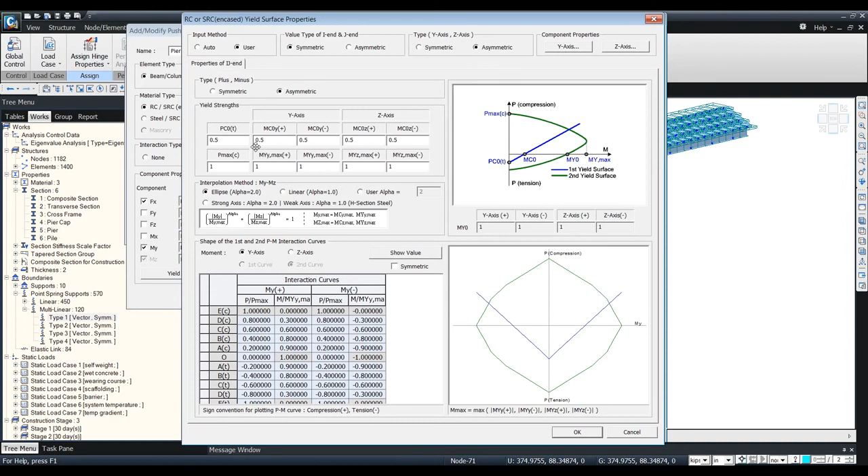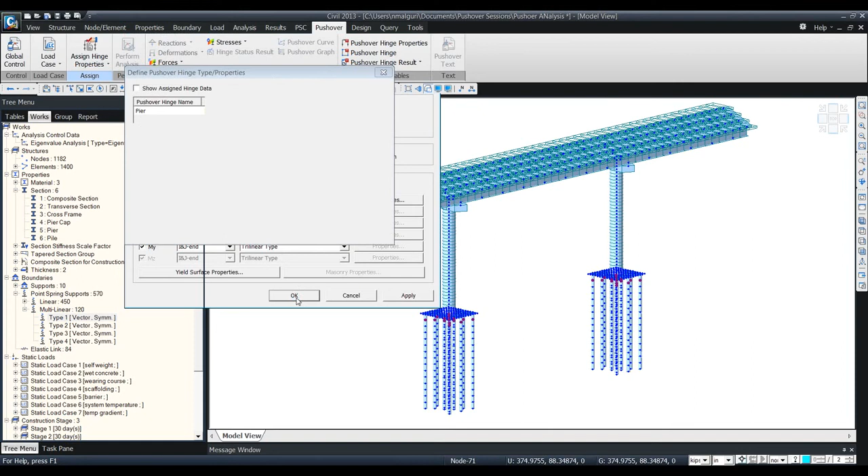Okay, so once I click on OK, the pier hinge has been defined, and I want to define the hinge for the pile too. So I'm going to define the hinge for the pile. Again, the pile is a compression member, so I'm going to select the PM interaction in status determination. So this is how I have defined the hinges for the pier and the pile.

Now I'm going to assign the hinges to the pier and the pile. So I'm going to select the members of the pier, selecting all the members of the pier. So what I'm going to do is double click on the pier cross section here, and you can see that the pier elements have been selected.

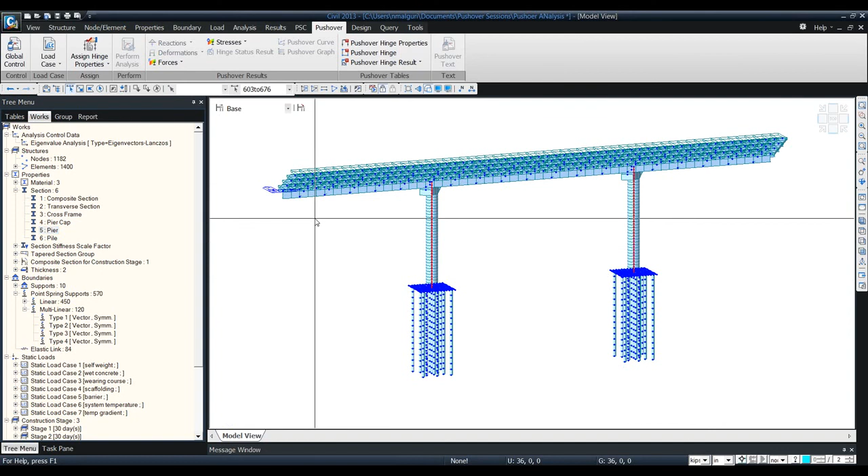They have been highlighted in red, and now I can drag and drop the pushover hinge for the pier onto them, and this is how the hinges have been defined. So it's pretty easy. Just double click on the cross section, the elements will be selected, and you can drag and drop the hinge that you have defined onto the elements. So this is how the hinge definition has been done.

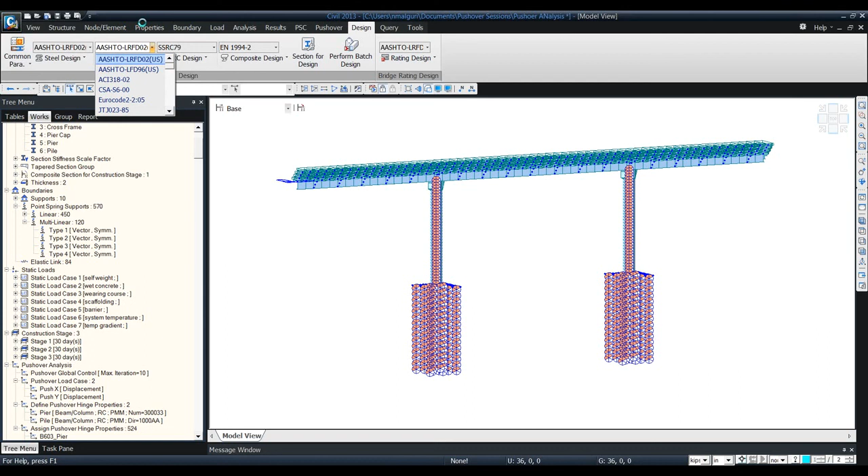Now when you talk about the hinge creation, you need to define the reinforcement in the cross section. The reinforcement must be defined in the design tab in the ribbon menu, and whatever code you select here, this code will be used to obtain the PM interaction curve, or to obtain the parameters in the PM interaction curve. So here I'm going to go to the column section data for checking, and I'm going to define the reinforcement for the pier and the pile. So this is how the reinforcement has been defined for the pier and the pile element.

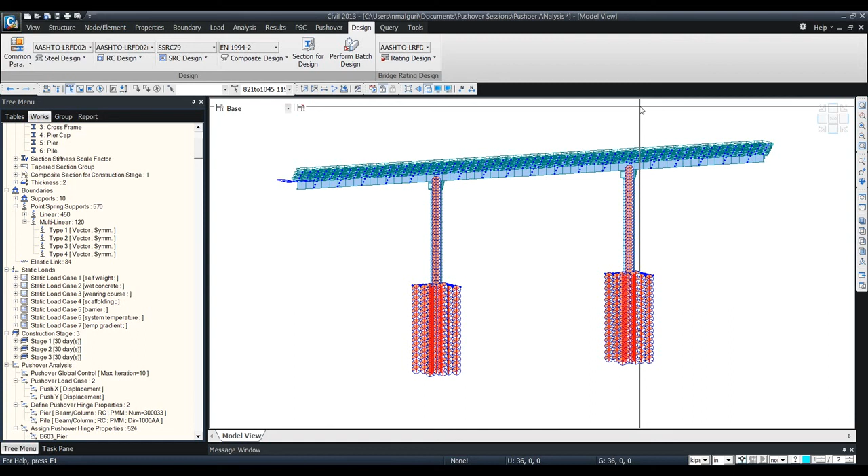And once you define this reinforcement, you can perform the analysis and obtain the results for pushover analysis. So now I'm going to open a model in which I have already done the pushover analysis, and I'm going to show you how the results for pushover analysis would look like.

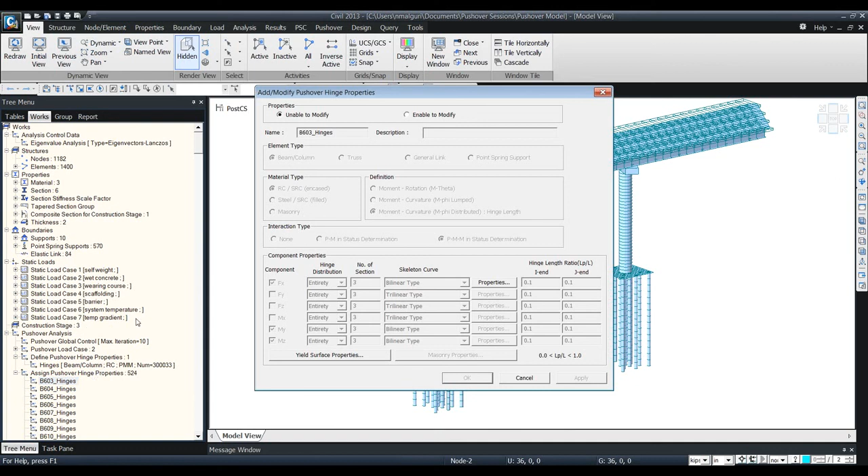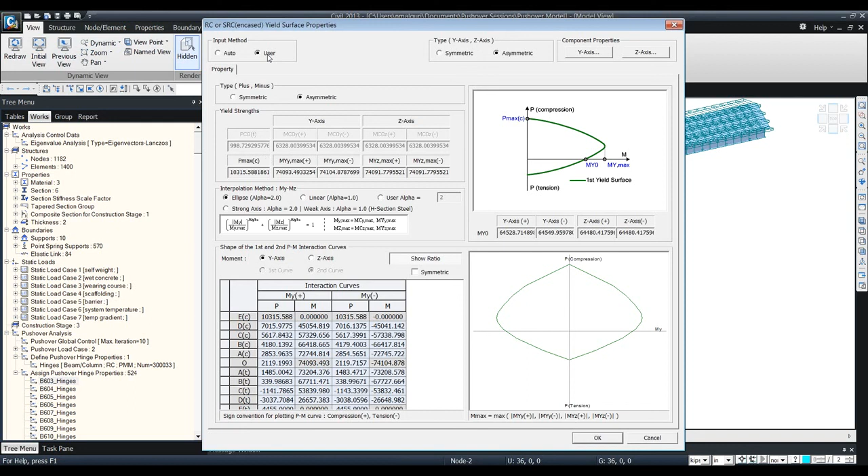First of all, when you perform the analysis, you can see the definition of different yield surfaces that the program has automatically generated for the reinforced concrete pier and the piles. So when I click on assign hinge properties and right click to obtain the properties, I can go to yield surface properties, and here I can obtain the PM interaction curve. Once I obtain the yield surface properties, I can click on show value and it gives me the PM interaction curve right here. Again, if I want to specify the user defined parameters, I can go to the input method as user. So this is how the properties have been calculated by the program.

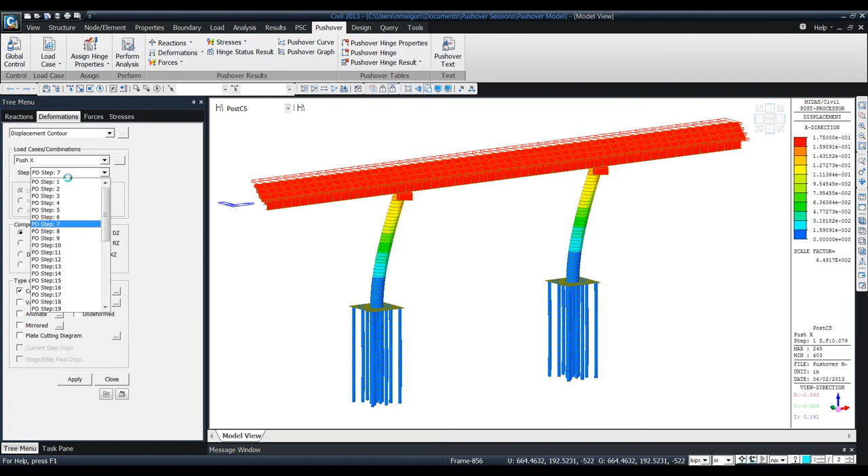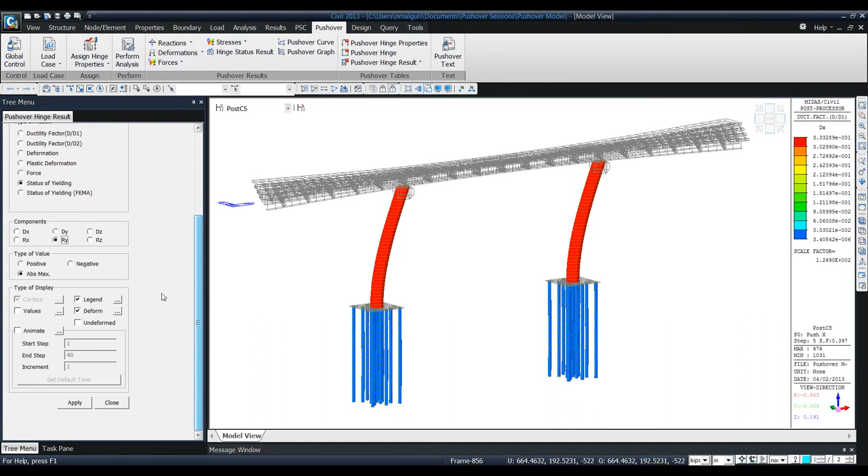Now let us see how the hinges are being created in this particular model. You can see the hinge status. So I'm going to go to status of yielding and go to RY. I'm going to hit apply, and the blue represents that the hinges are not formed. So I keep on increasing the steps. Again, the hinges are not being formed.

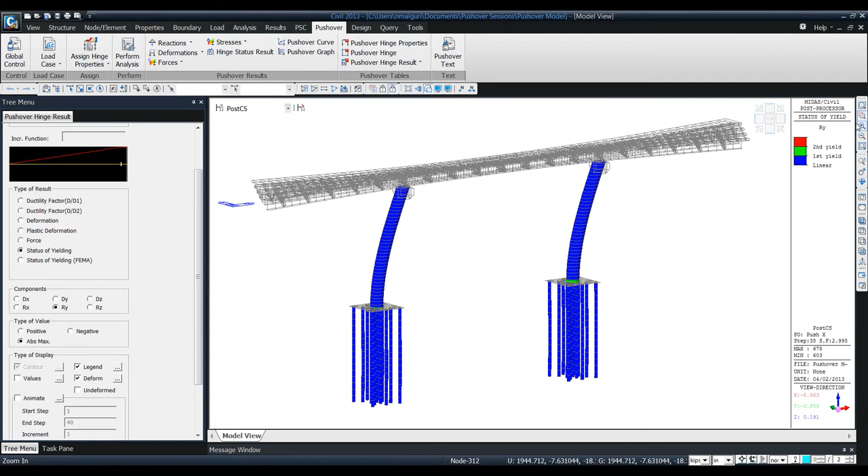Now in this region you see that the hinges have started to form. So you can see at the bottom of the pier the first hinge has occurred, and this is how it is shown. The color code tells you that the hinge has been formed, and when I go to the last step you will see that other hinges have been formed. So basically you can obtain the status of yielding of the hinges from pushover analysis, and you can scroll down to different steps to perform pushover analysis to obtain the status of yielding.

For this particular example, I performed the pushover analysis to have a maximum translational displacement of 7 inches, so the hinges are only occurring at the bottom. But if you do this kind of analysis for about a foot of deformation in the event of an earthquake, then you will see hinges occurring at multiple locations on the pier.

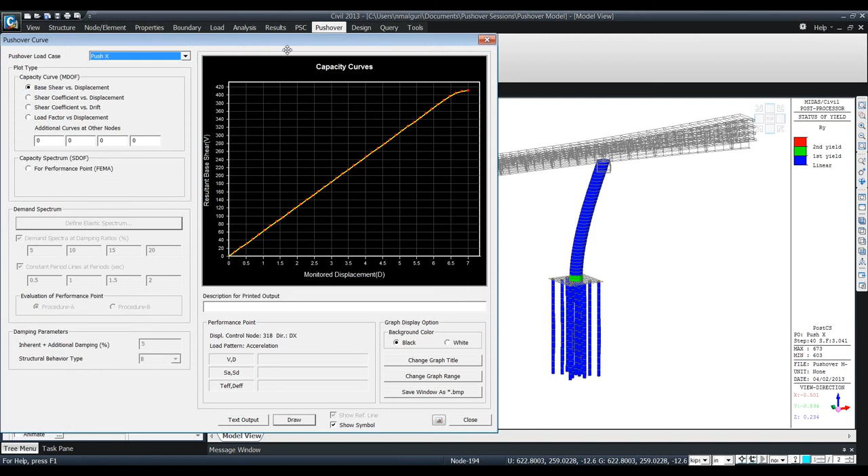You can obtain the pushover curve by clicking on the pushover curve here, and in the X direction this is how it appears. You can see that after approximately 6 inches of deformation, the structure turns nonlinear, and similarly in the Y direction the behavior of the structure is almost elastic till 7 inches of deformation.

Now let me go to the pushover result table and show you the different result tables that you can obtain for pushover analysis.

So here, if you want to obtain the yield step table, you can go to the yield step and obtain the yield step for pushover Y and X in the Y direction. Once I click OK, you can see the status of different elements while performing the pushover analysis, and when the first and second yield occur. You will see that for the pier elements, the yielding step is step number 38 and 39 respectively.

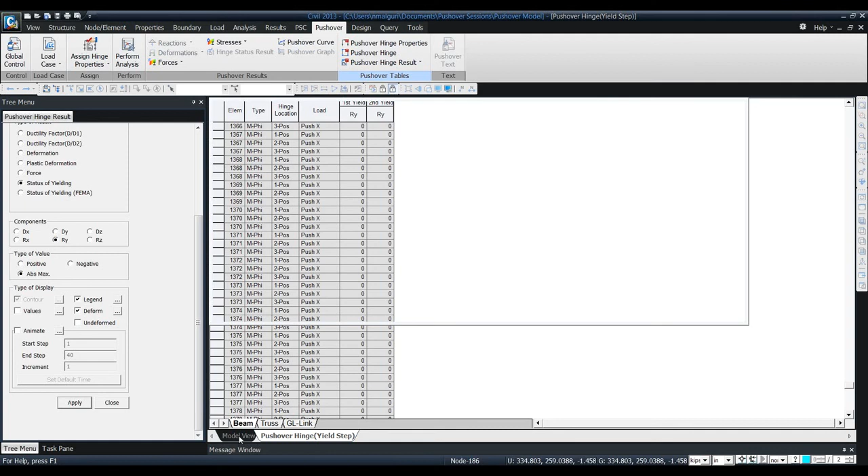So this is how pushover analysis is performed in Midas Civil. We do have specific tutorials that will tell you how to perform this kind of analysis and how to obtain the results from the same. So this is what I wanted to convey to you guys today. If you have any questions, please let me know through the questions window and I'll be happy to answer them.

Okay, so I've got a question here. Does Midas Civil automatically calculate the moment curvature too while performing the pushover analysis? Yes, Midas Civil automatically generates the moment curvature curve as per the defined code, and it will perform the pushover analysis based on those specifications.

Okay, I've got a question here, and the question is, how can you put the pushover curve with the response spectrum curve together while they have different axis parameters? We cannot do that, but what we can do is change the parameters of the pushover capacity curve, and then we can put them with the response spectrum curve.